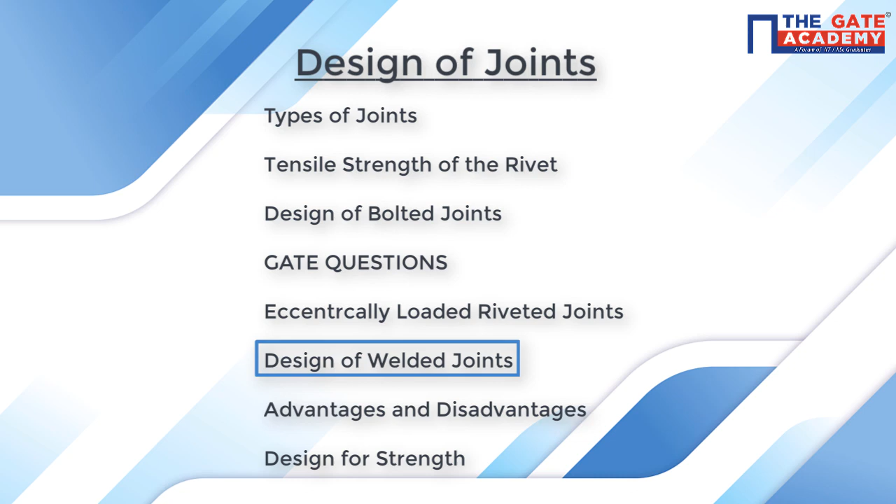First place. Done everybody? Shall we go ahead with the remaining two joints, threaded joints and welded joints? We're done with 80% of this chapter. So remaining 10%, 20% are there. We'll complete them.

After that we'll go with the next chapter, designing of bearings. So today we'll try to complete half part of designing of bearings.

So we are going with the next one, designing for threaded joints. Please remember that the questions from this part are not asked at very higher depth. So whatever is required at the gate level, we'll be discussing at that level itself. Same goes for welded joints as well. That's the reason why 80% of the chapter is dedicated to only rivets. The remaining 20% is only for threaded joints and welded joints taken together.

One of the biggest advantages, or the biggest reason due to which we are using threaded joints for these many number of years, is that they are separable. Due to threaded joints, we can experience higher load carrying capacities of joints and also keep them separable. Whatever threaded joints are used nowadays, every threaded joint is a separable joint. Due to this biggest advantage, we are using these threaded joints that extensively.

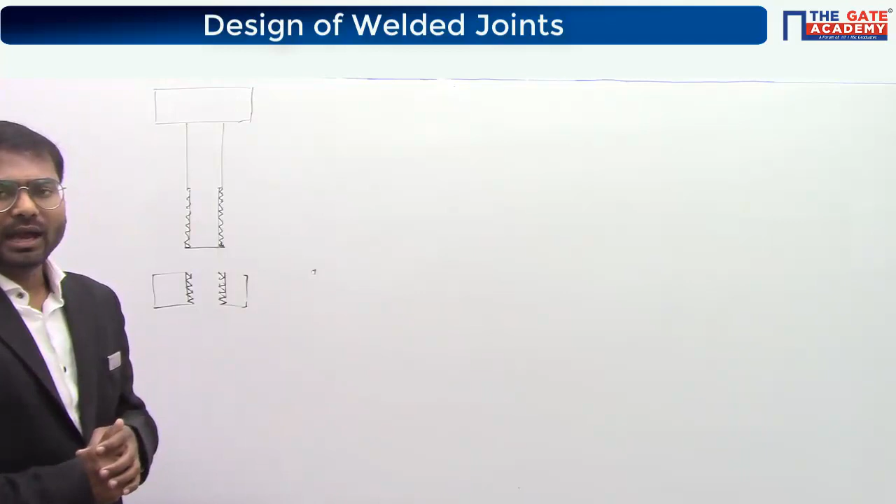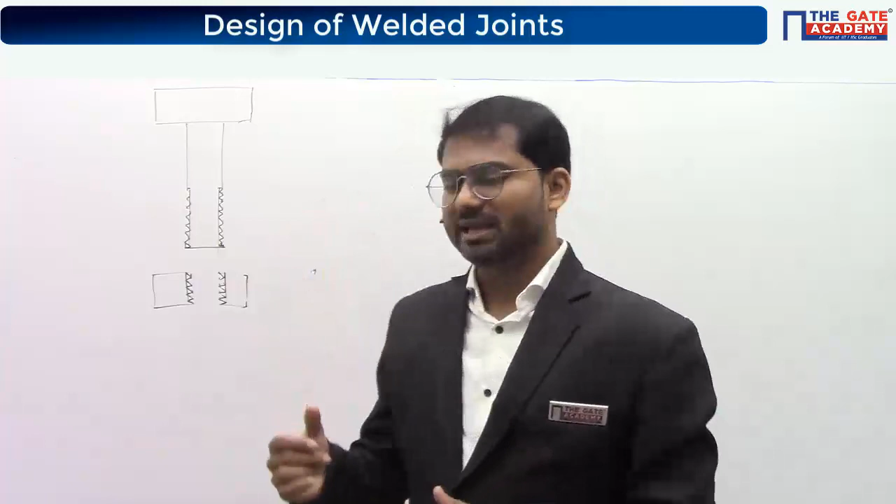Now, if you join those two plates this way, there is a high chance that the bolt head can damage the top surface plate, and the nut can damage the bottom plate surface. The reason is the basic level heat treatment process which we use for the bolt and nut assembly is quenching heat treatment process.

Bolt and nuts are made to experience quenching heat treatment process. This quenching heat treatment process makes the surface very, very hard. In fact, it brings a huge amount of brittleness in the total volume, and it also creates huge hardness on the surface. As the bolt and nut materials are very hard, definitely they are going to be

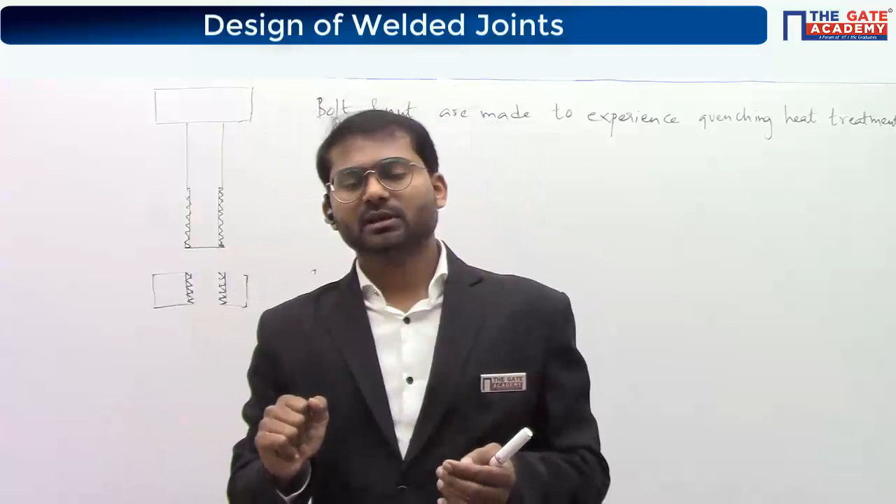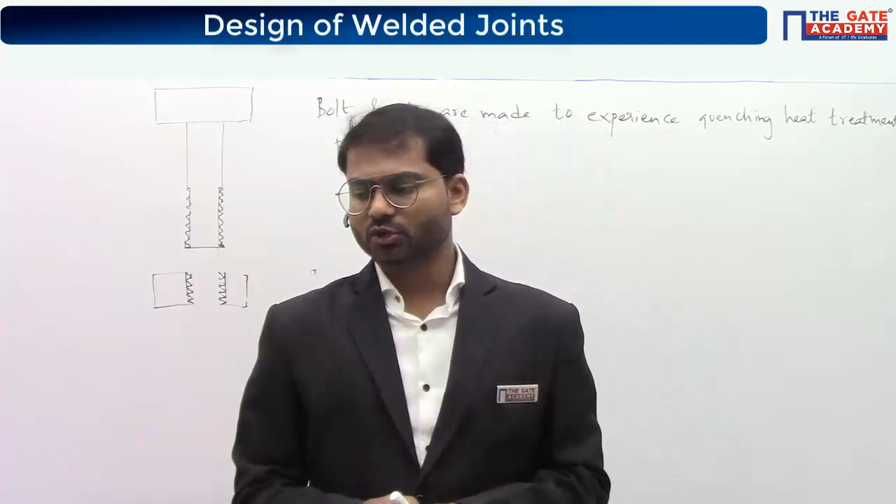Washer is between the head and the plates. If you take it, the washer will be kept here. So this is the washer, this is the first plate, and this is the other plate. So this is one washer, and this is another washer. Here also you should keep another washer.

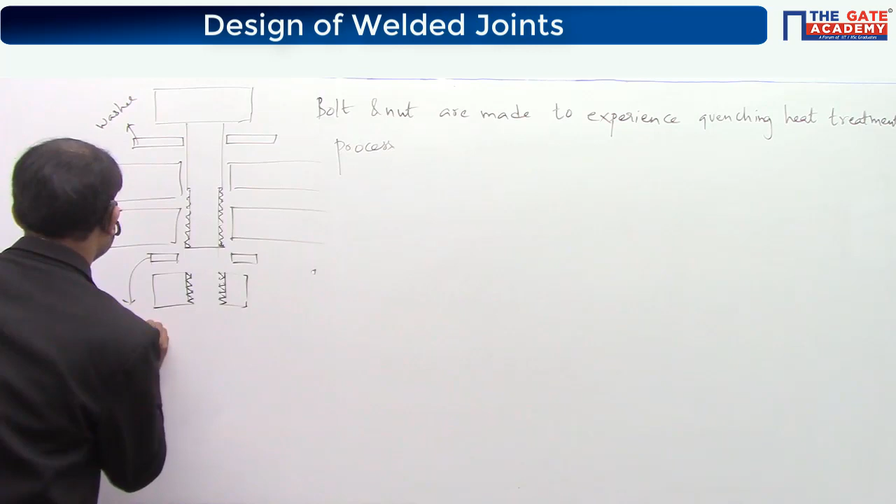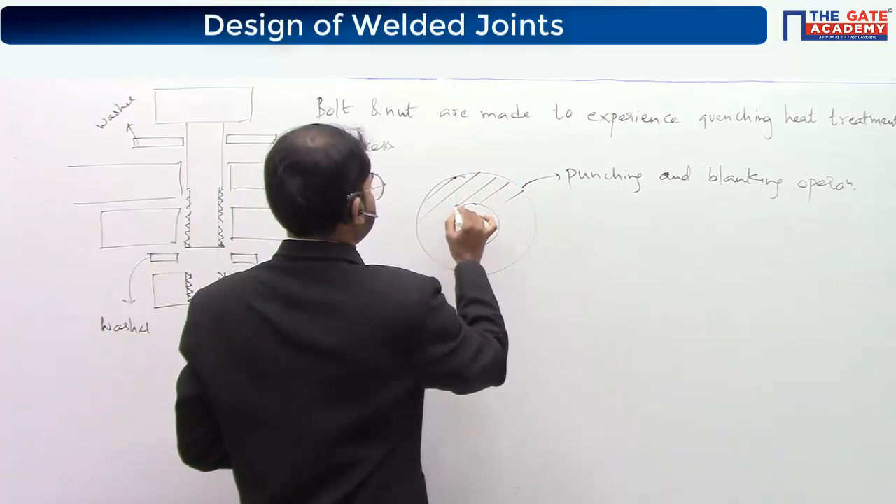Washer means simply like this. You will make a disc and punch a hole. So it is simply made by blanking and punching operation. In manufacturing engineering, we'll study about this operation. The material will be like this, through punching and blanking operation.

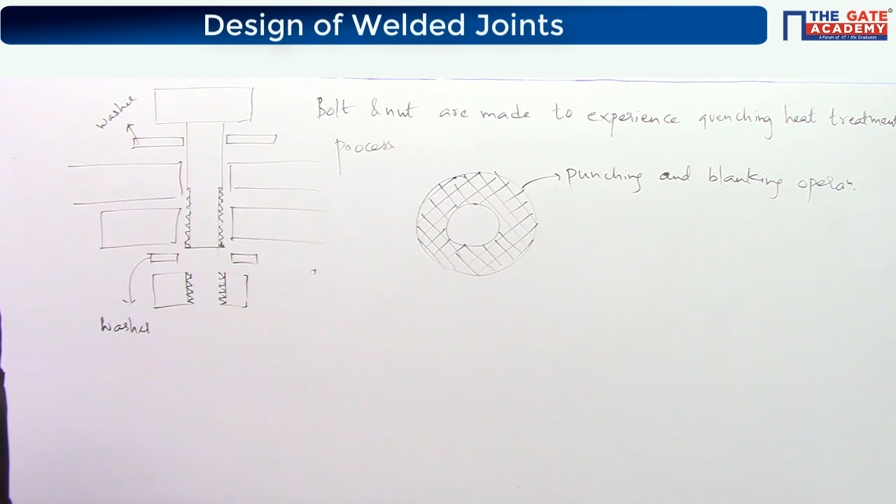Clear? The very important usage of this washer is it avoids damage of plates by the head of the bolt and the nut. Due to this reason, washer is used.

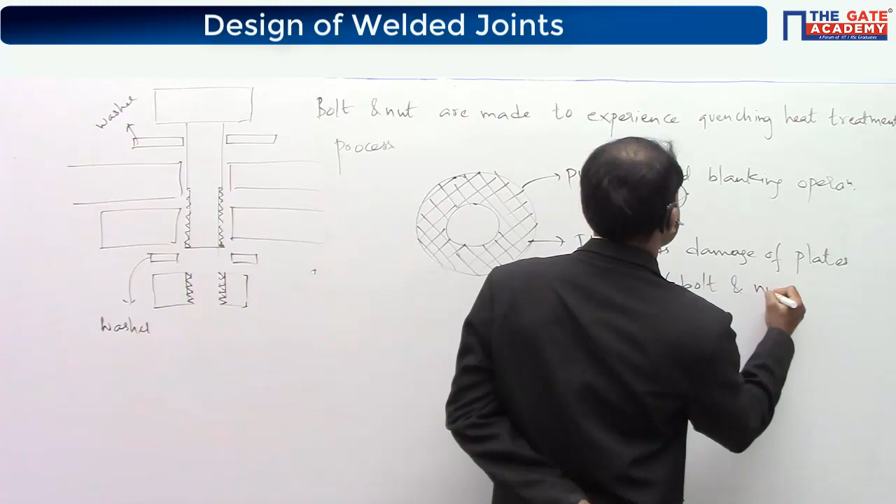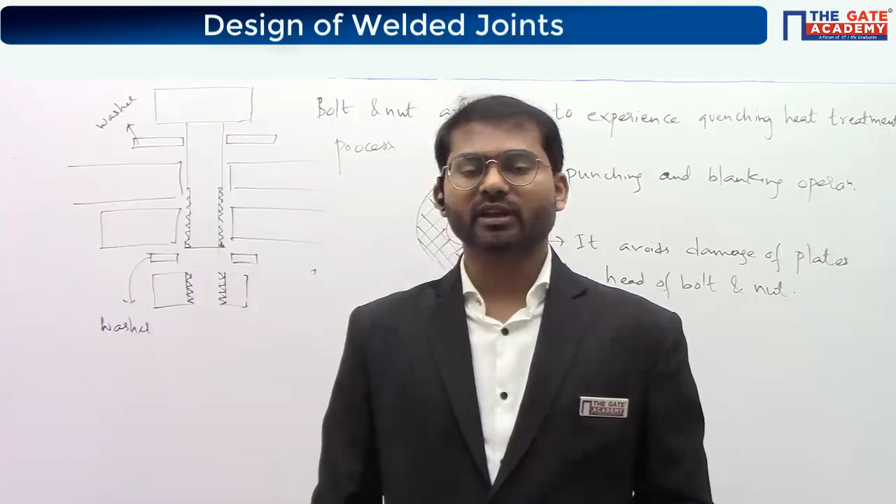It is one of the interview questions. It can come in interviews because these are all basic things that are tested, one-line answers which are very important in interviews. So kindly remember this. Clear? Kindly copy all these things, we'll go ahead.

So there are few terms here, many of which are already familiar to you regarding bolted joints. Let's discuss them. Generally, whenever you make a bolt, you know it has 3 parts.

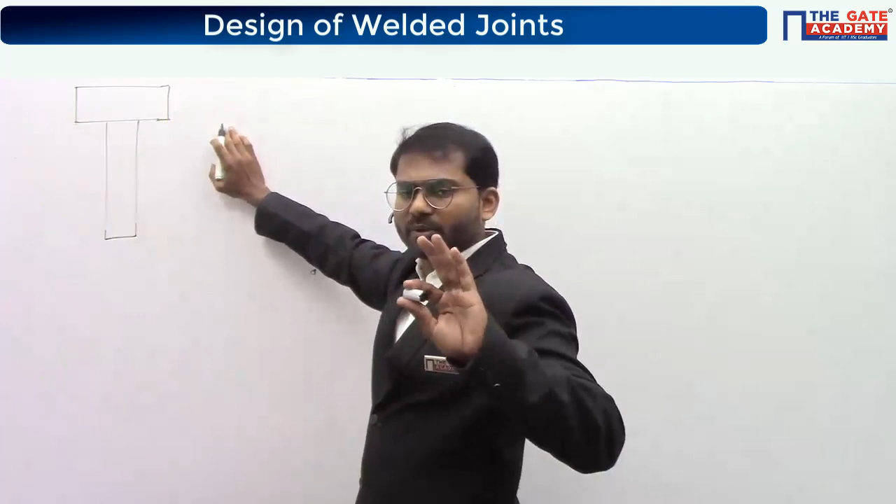When manufacturing this bolt, we do the turning operation or whatever manufacturing process is required to make the head, then turning to make this part. After producing the cylindrical part, we do the threading, which produces the thread. So this part is called the head, this part is called the shank, and this part is called the thread. I hope these basic terms are known to you.

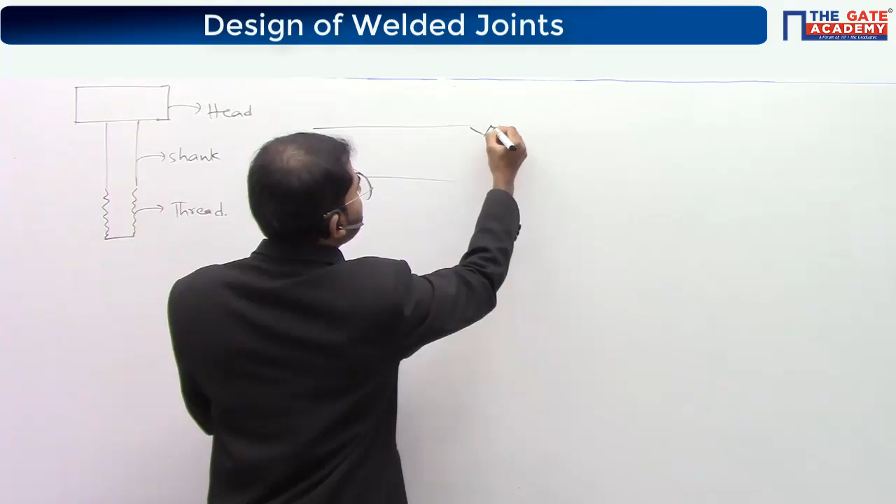Now, if you take the shank or cylindrical part, the thread is made from it. This diameter is nothing but the major diameter, also called the nominal diameter.

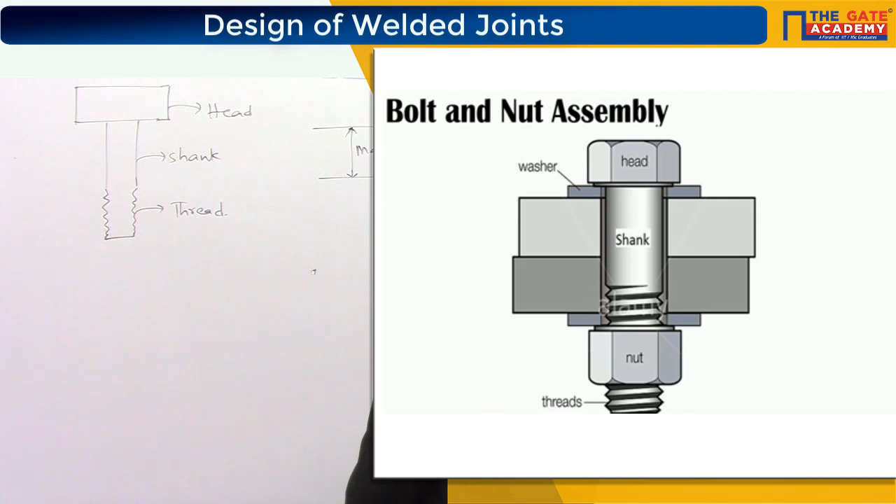And this diameter here is given the name minor diameter or core diameter. So major diameter and minor diameter — these two are very much known to you already.

Now let's see the pitch or effective diameter. If you take the thread part, the thread would look like this. If you draw an imaginary line passing through these threads, taking those lines which produce the same value of intercept on the thread and in the gap, the distance between these two lines is called the pitch or effective diameter.

Please remember that major diameter and minor diameter can be measured directly because they are physical values that can be seen. But the pitch or effective diameter is only a virtual, imaginary concept — we can't see it directly. In manufacturing engineering, when studying metrology and inspection, there is a technique called the 3-wire method, and another called the 2-wire method, used to measure and calculate this value, since we can't just imagine where the line passes. It's not feasible to do it that way, so we use the 3-wire or 2-wire method. I hope these three terms are clear.

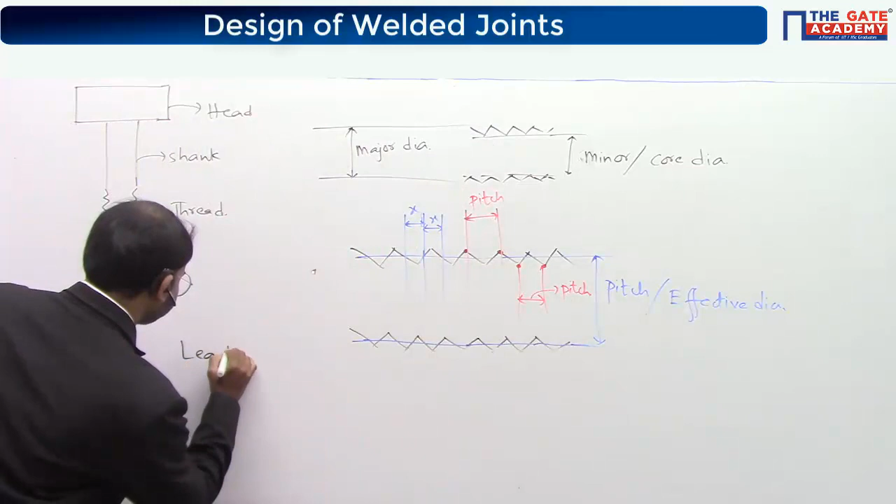The next term is very important — more than the definition, you should be clear about the difference between lead and pitch, because they are not always the same. Lead is defined as the axial displacement of the bolt per one revolution — when you rotate the head of the bolt by one full revolution, the axial displacement produced is called the lead.

After this, we're going to see the difference between lead and pitch, and also when lead and pitch become the same. Kindly copy this down, and you can take a screenshot of the next part.

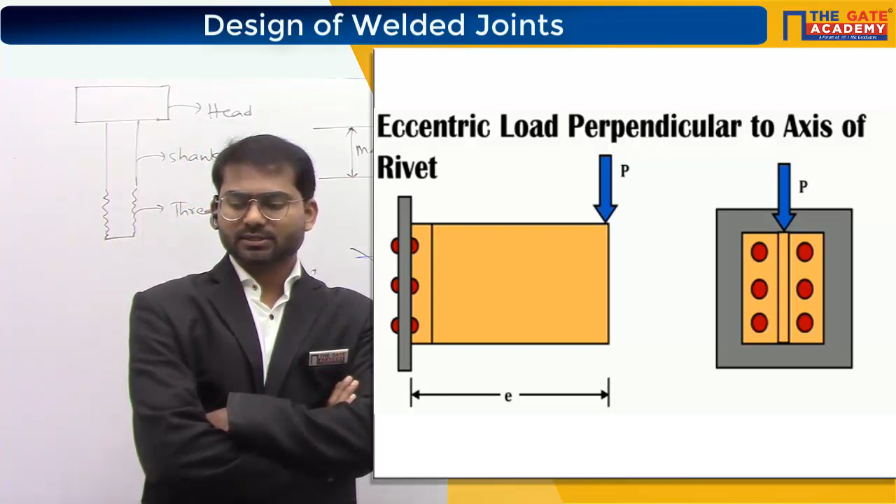The difference between pitch and lead arises when there are multiple threads, which we call starts. If there is a single thread, it's called a single start bolt. If there are 2 threads, it's a double start bolt. Similarly, if there are 3 threads or coils, it's called a triple start thread. When there are double starts, the lead becomes double the pitch, or the pitch becomes half of the lead.

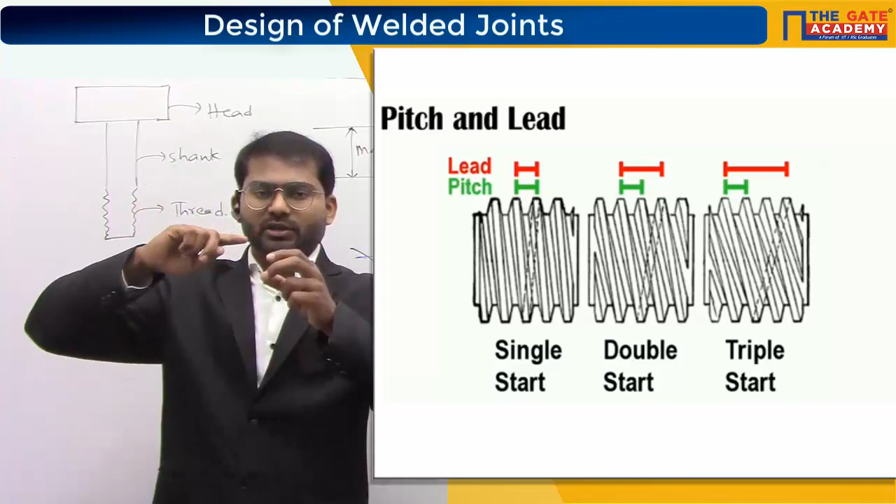In the same way, if you see the triple start thread, when there are 3 coils or 3 threads, you can see that pitch becomes 1/3 of that. The actual rotation, the actual displacement is produced by 1 revolution, that means if you rotate the bolt by 1 revolution, actual displacement will be happening.

The actual displacement happens based upon the thread, how much distance the thread was made to go. So this is the core part. Let's assume this is the thread here. It comes like this, like this, and here. So this thread goes from here and comes here. So this is the axial displacement, which is nothing but the pitch. It will go like this and it will come.

Now in between you put another thread. Let's assume it is a double start thread. So what I am doing here, I will put another thread, I am putting a different color here. It will go like this, it will go here, and again it comes from here. Understood?

Sorry, this displacement is lead actually, we discussed this one as lead, not pitch. But for pitch, we have a definition that distance between 2 adjacent points. Now if you observe, this point, the similar adjacent point is no longer this one. If this thread is not there, this would have been the adjacent point, then we would have called this one as the pitch itself. But this thread came up, so this becomes the pitch.

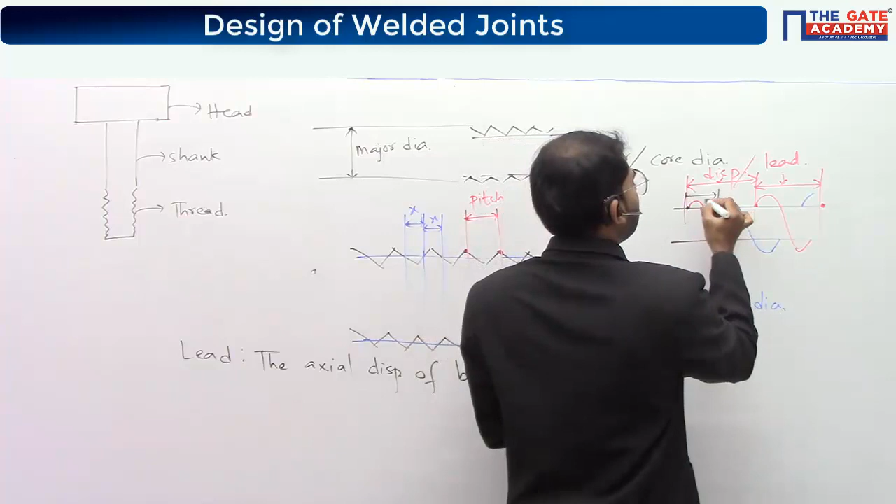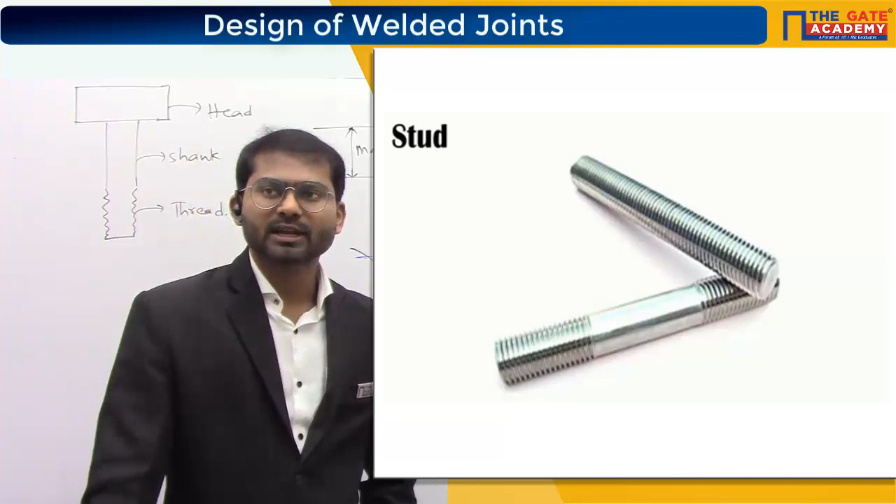So based upon the number of threads or the number of starts, the pitch decreases by that factor. So if 3 starts are there or 3 threads are there, pitch is equal to lead by 3. If 2 starts are there, a double start thread, then pitch is equal to lead by 2. Axial displacement is going to be the same as long as you are keeping the same lead in each and every type of bolt.

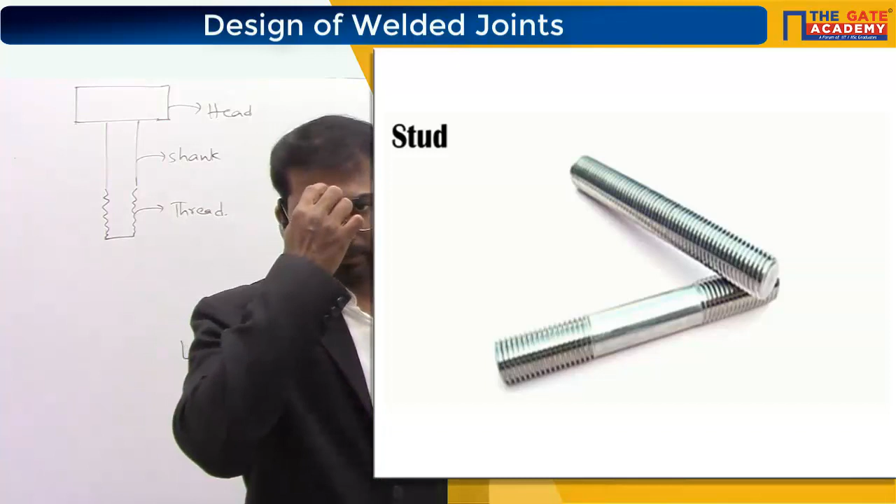You take single start, double start, triple start like shown in the secondary screen. You maintain the same value of lead, then you rotate the head by 1 revolution, in every case displacement will be the same only. Here the discussion is not about which one will have more amount of lead or more amount of axial displacement. The discussion is about the relation between lead and pitch, and based upon the number of starts you will be getting pitch. That means number of starts decide what is the relation between pitch and lead.

Now the other one is a tap bolt. Tap bolt means you will not be having any sort of nut wherever you would like to attach something with a wall, something like that. So then we'll be using a tap bolt. When you can't drill or make a complete hole, then we'll be using a tap bolt.

Then the next one is a stud. Stud means basically, the below diagram is the stud here. Stud means basically a cylinder is taken and thread is made on both the corners. So to join 2 plates using a stud, you have to use 2 nuts and 2 washers. Understand? So a stud is also used in the cases where you can't drill a complete hole from one side to the other side. Wherever you face this problem, you have to go with tap bolt only.

Generally we use screw in the name of tap bolt. So screw is the word in the general sense, because if you talk at machine design or technical sense, there's a screw jack, there's a power screw. There is another definition we'll be using at some other instances or contexts which are not in our GATE syllabus. So screw in our real life sense is used as a general word. Sometimes we use screw for bolt also. We don't use screw for nut, but we do use it for bolt as well. But in most of the cases we use screw for tap bolt.

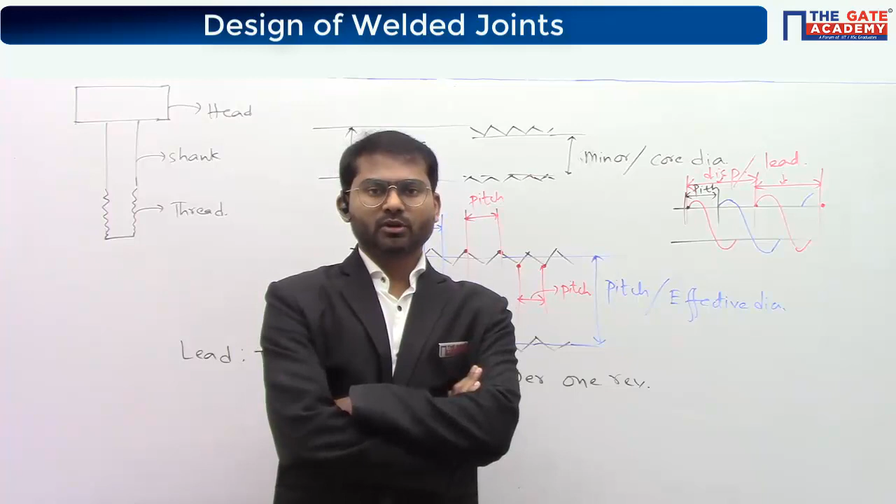Clear? Understand? But remember what is bolt, nut, washer. These terms are very important. You should follow them because in questions if they give you dimensions or something, you should understand what that is related with respect to, whether it is bolt or nut.

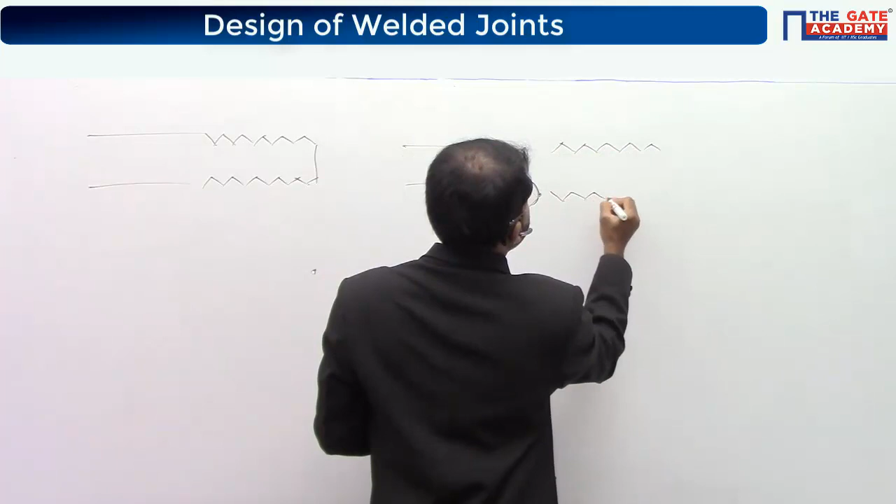Shank is made equal to the core diameter, and you know the requirement of this is to nullify or reduce the effect of stress concentration. If you go with this arrangement, you can see that the stress lines are very near to each other at this region, in these regions here.

So in these regions, the stress lines are very near to each other. There is a high chance that stress can go beyond the strength of the material and cause failure. That's a very dangerous thing.

So we don't expect that to happen. That's the reason why we make the shank diameter equal to the core diameter, so that area of cross section is uniform. That gives rise to same stress along the length, so same strength or designing stress also will be same. We call this a bolt of uniform strength. Bolt of uniform strength means you make shank diameter equal to core diameter.

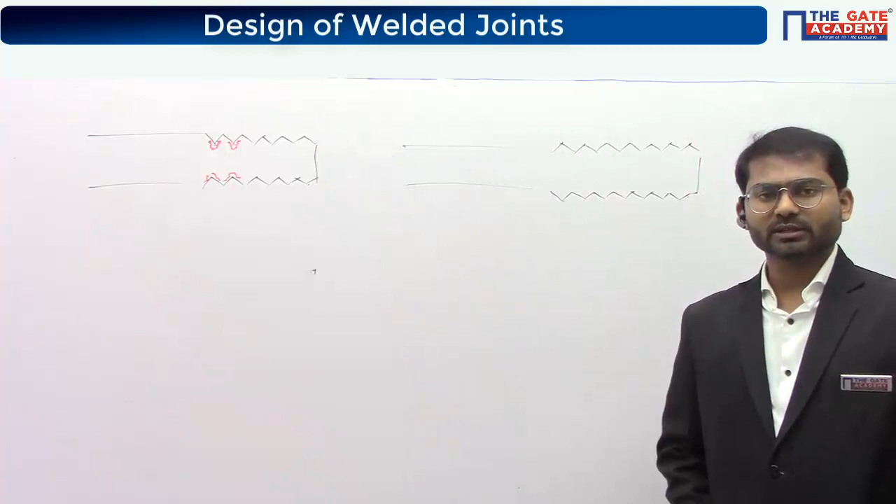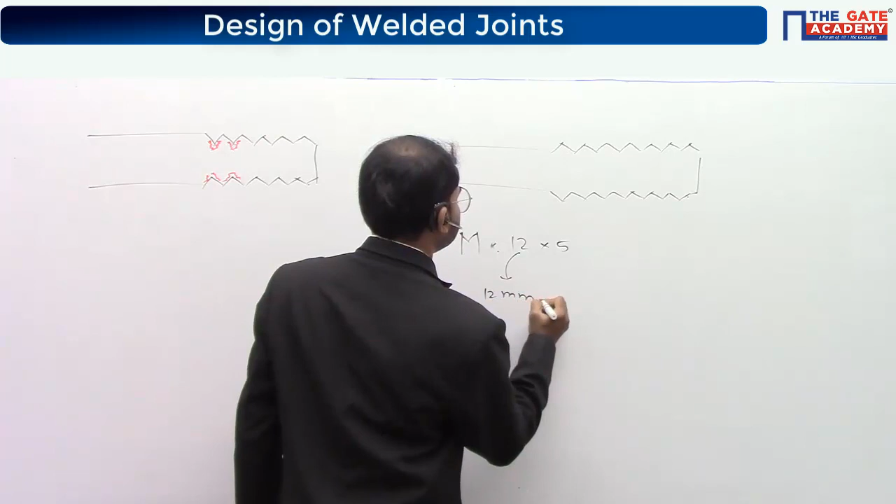And one thing I would like to say, this is very important, I forgot. Generally bolts are given with a name like this, M12 into 5. This means 12 mm nominal diameter, and this is 5 mm pitch. Both the values are in millimeters.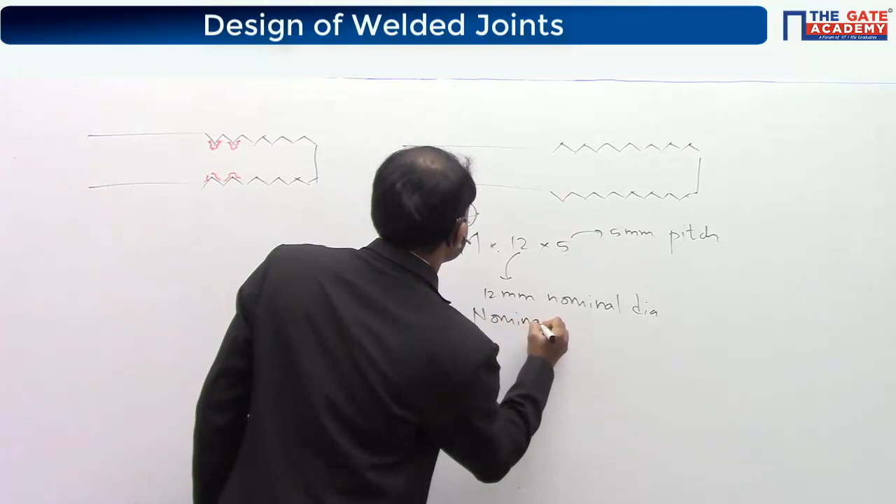Another thing, please keep in mind, whenever they say diameter of bolt, find diameter of bolt - diameter of the bolt is nothing but nominal diameter itself.

Clear? So if you would like to find out stress, you have to find the area of cross section of the bolt required to carry a particular load based upon the strength. So you get the value of area as load by stress, and you'll be getting some area, that is pi d square by 4. That gives you the value of d. You should give this value as nominal diameter, though you are actually finding core diameter - give it as nominal itself.

The reason is, strictly speaking, you should be designing with respect to core diameter only - every calculation should be done with respect to core diameter only. But we do it with respect to nominal diameter itself because it becomes easy for us every time to use, or easy for us to measure the nominal diameter in a practical sense.

And second thing is, in every loading case, we generally, in most cases, take a factor of safety. So when you take factor of safety, automatically this error, whatever it is, can be taken care of. Everybody understood what I said?

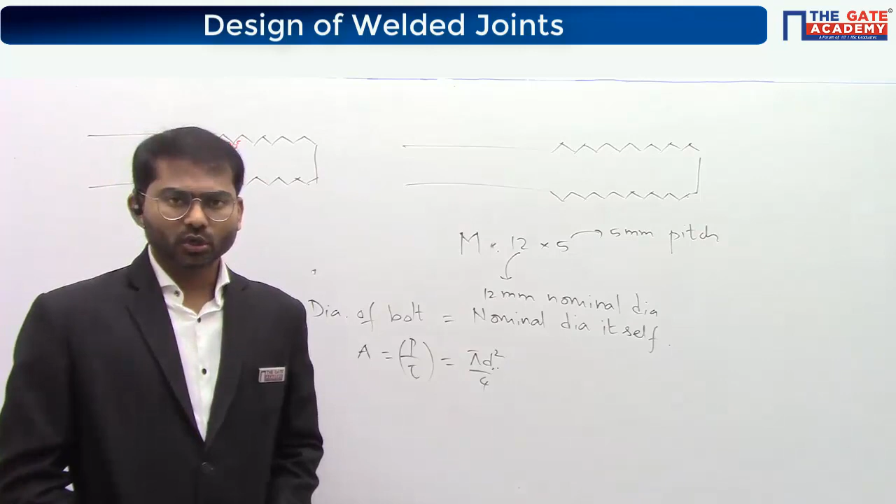I said that though we actually have to, or we are supposed to, design with respect to core diameter of a bolt, we will be designing with respect to nominal diameter itself, due to the reason that in practical sense, nominal diameter can be easily measured. Just take a vernier caliper and simply measure this diameter - you can easily get the value of diameter, which is nothing but nominal diameter. But measuring core diameter is a little bit difficult.

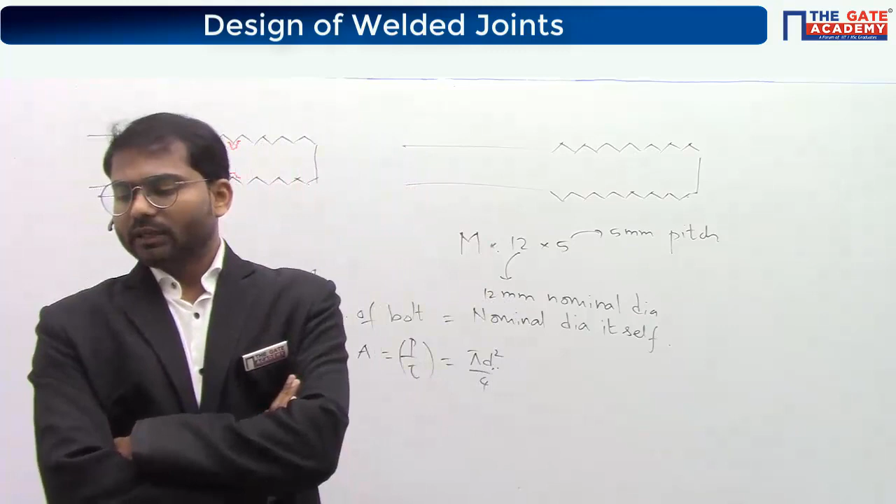As compared to measuring a nominal diameter, that's one reason. And second reason is, though you are going with the nominal diameter, the error whatever it is there can be taken care of using factor of safety. In a real scenario, definitely we'll be taking some factor of safety, so that will be automatically taken care of. You don't need to worry about that. Clear, everybody? So the options are something like this.

M8, M10, M12, M16 - these are the options for this question. Only copy the question and get the answer.

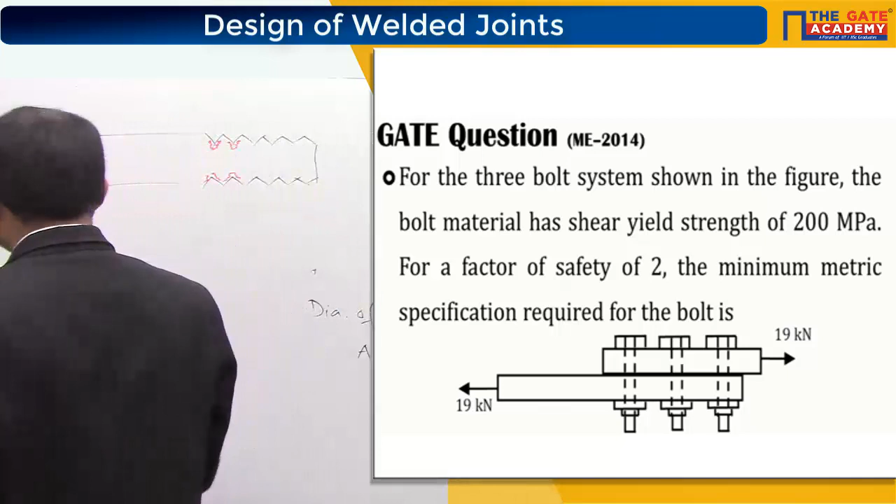In every scenario, it is not completely possible for us to eliminate the effect of stress concentration because we require some shapes. So if you require some particular shape, definitely area cannot be maintained uniformly. So wherever possible, satisfying the objective, we try to avoid the stress concentration. If it is not possible, we'll go with that itself.

Come on everyone, get the answer. Okay everyone, let's look into the solution for this question.

It's given that for the 3 bolt system shown in the figure, the bolt material has a shear yield strength of 200 megapascal. That means shear stress can or should be less than or equal to 200 megapascal. This is a failure stress.

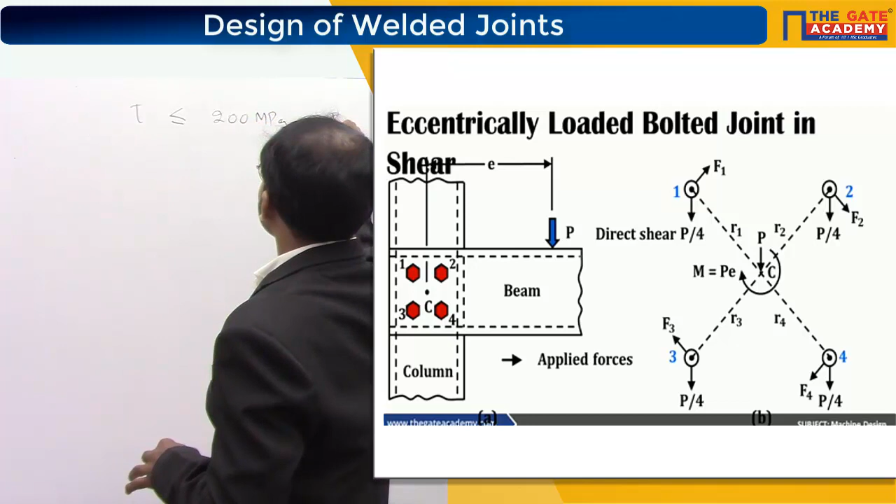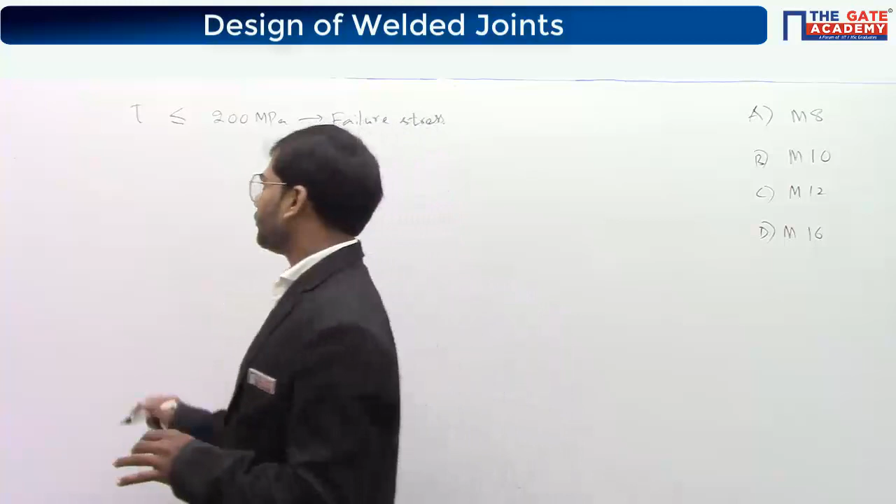But if you see the next statement, it is given that for a factor of safety of 2, the minimum metric specification required for the bolt is. So they are taking factor of safety. So factor of safety should be taken. When you take factor of safety, you have the formula that failure stress by allowable stress.

So factor of safety is given as 2. This implies allowable stress comes out to be failure stress by factor of safety. Failure stress is 200 megapascal. We'll keep it like this. By factor of safety is 2, this becomes 100 megapascal. You have to make sure stress is not going beyond 100 megapascal. That's very much required here.

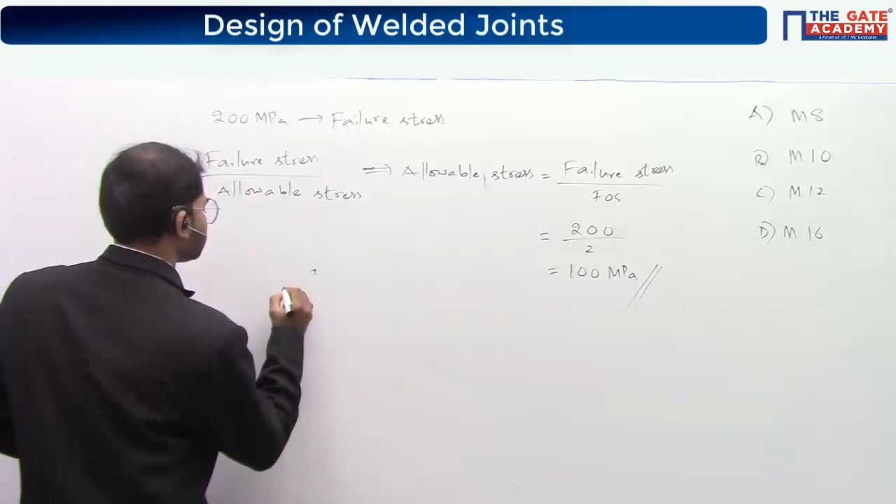Now, if you take here, force is applied. In each and every bolt, shear stress is produced because every force is parallel to area of cross-section of the bolt. The joint fails only when all three areas of cross-sections are sheared. So we can say load stress area relationship is like this: load is equal to stress into thrice the area here. Load is given as 19,000 Newton. Shear stress is got it as 100 megapascal. So I'm putting stress in megapascal, area will come in millimeters square, and this is Newton. So thrice into area pi d square by 4.

If you simplify this, you will get the value of diameter as some 8.78 or something, more than 8 will come. What is the value you are getting? 8.97. So you are getting 8.97. So this makes you think the answer is M8, but it is not the right answer.

Why? Look here. To carry this load, from this formula we should write down area is equal to load by tau into 3 here. To carry a load, area should be greater than this value, P by tau value here. So if you put greater than sign, the sign will be like this, so D will come like this.

To satisfy the condition, we need to carry a load and make sure stress is less than 100 megapascal. That means A should be more than that. If you increase the diameter, increase the load, to increase the numerator, the whole fraction will increase. So A should be greater than P by 3 into tau. That means diameter should be more than 8.97.

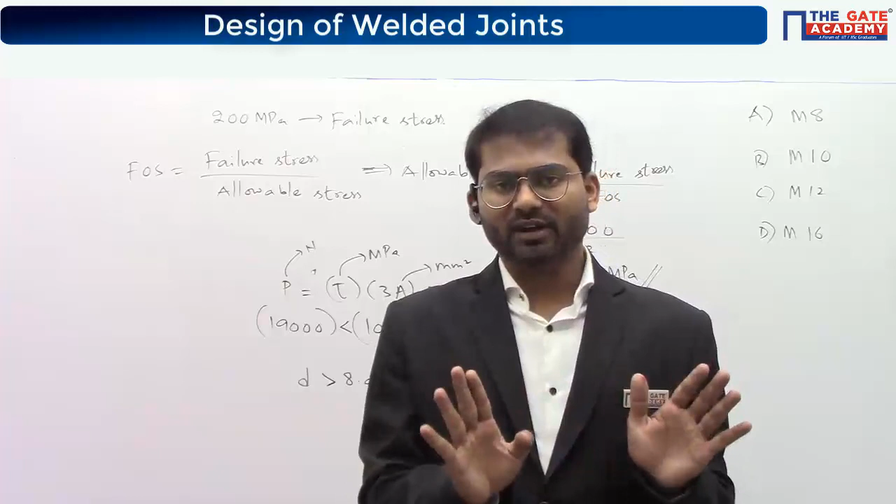Clear? So everywhere they are given the value of diameter itself. Okay? And whatever diameter they expected to get the value, like this question, they expected it to be nominal diameter only. Whatever you get, that is nominal diameter itself.

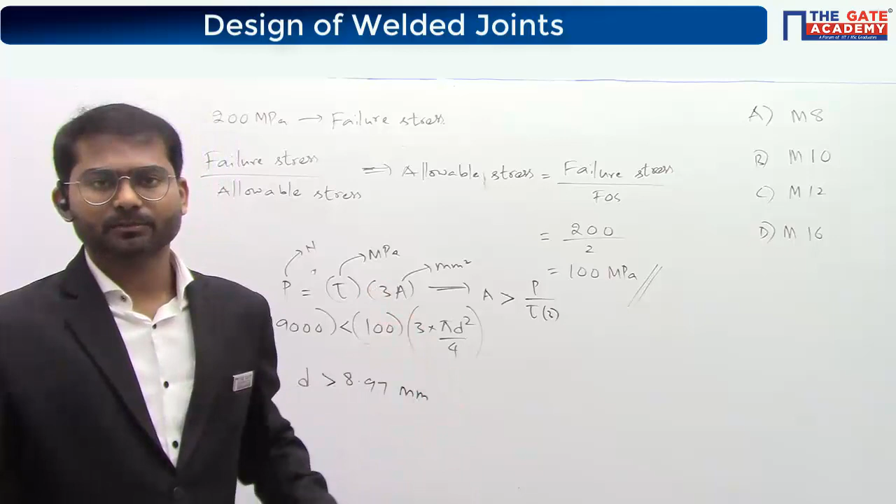Clear? Because 0.8 times diameter is not for every type of thread, because there are different types of threads based upon the requirement or objective you have. So in every case it is not followed. That's the reason why we can't go with the formula 0.8 times diameter. So in textbooks for your semester syllabus, they tell you to use the formula in a default way wherever you don't know the type of the thread available there.

Clear? So kindly solve this question, the first step of eccentrical loading. I hope everybody have understood that this is the first type of eccentrical loading, where primary and secondary both are of shear type. I hope at least there is no confusion regarding that.

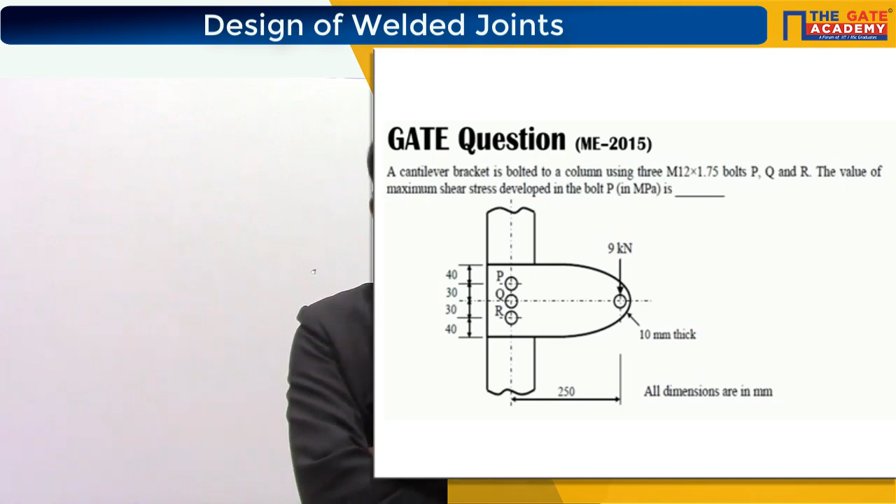If you are getting answer for this question, I want you people to apply the knowledge of this question in the next question and get the answer just by looking into the options. That's why I want everybody to get the right answer for this question. Kindly don't skip it.

If you got the wrong answer, the correct answer is around 332.5 megapascal. This is the correct answer.

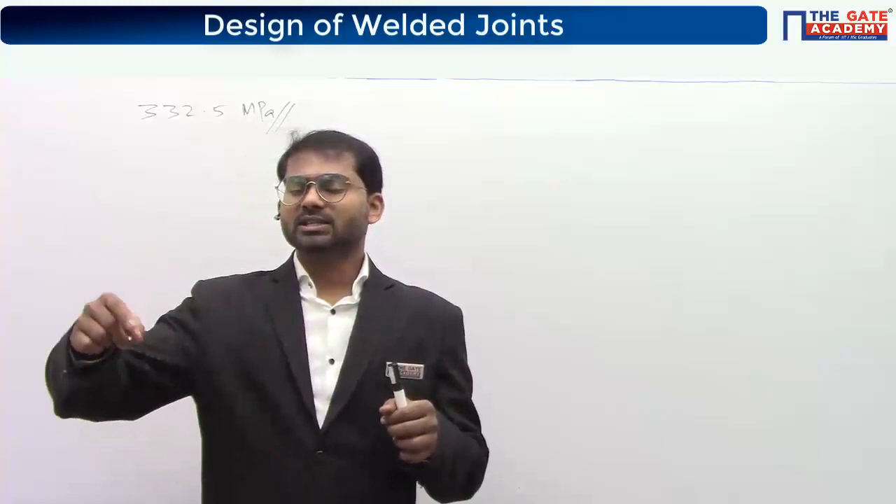Okay, so let's go ahead into the solution here. Listen carefully. Anyways, if you have got the answer, then there is nothing extra to understand here. But whatever knowledge you have applied to this question, that will help you to get the answer for the next question without solving anything, without using pen and paper.

I can show you the screenshot, I can show you the question as well. So I want you people to think smartly based upon the knowledge of this question, the previous question, and get the answer for this question here. You just have to identify which option is right, that's all about this one here. Okay, so if you solve this question, there are three rivets which are kept in a vertical fashion.

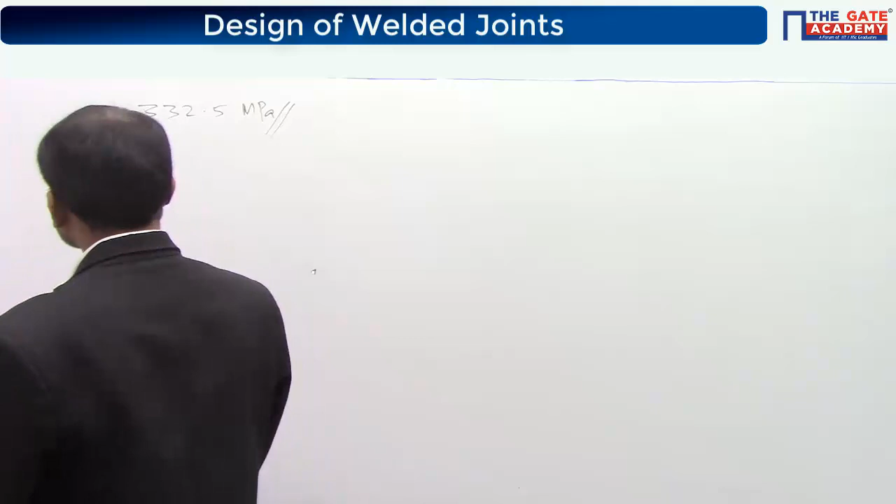So this is a centroid. If you transfer the load here, you will get P and P into E clockwise. Let's take this numbering as 1, numbering for this one as 2, numbering for this one as 3. So we have P1 dash like this, P2 dash like this, and P3 dash like this.

And you know the value of P1 dash, P2 dash, P3 dash. It is simply nothing but 9 by 3 kilonewton. Now you have to take R1, R2, R3 so that we can find out the secondary loads. So this is R1, R2 is equal to 0 or R2 won't exist, and this is equal to R3.

Now you take the perpendicular direction. So this is a perpendicular direction, this is a perpendicular direction. So we have P1 double dash like this, and P3 double dash like this. This is 90 degrees, this is also 90 degrees. So theta 1 is equal to 90 degrees, theta 3 is equal to 90 degrees.

Now, in this question, they are asking the maximum shear stress developed in the bolt P, that is the first number here. Directly we have to get for this one. So if you take the primary one here, primary is nothing but 3 kilonewton. Secondary one is nothing but P into E into R1 by R1 square, R2 square and R3 square.

This comes out to be P is nothing but 9 kilonewton. E is equal to, given in the question, as 250 millimeters, and R1 is equal to nothing but 30. So by 30 square plus 0 square plus 30 square. Okay, so you will get the secondary force value.

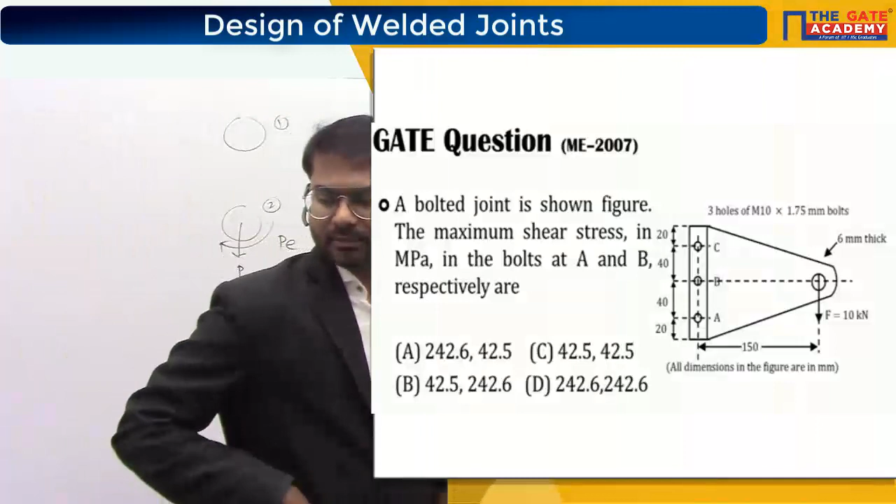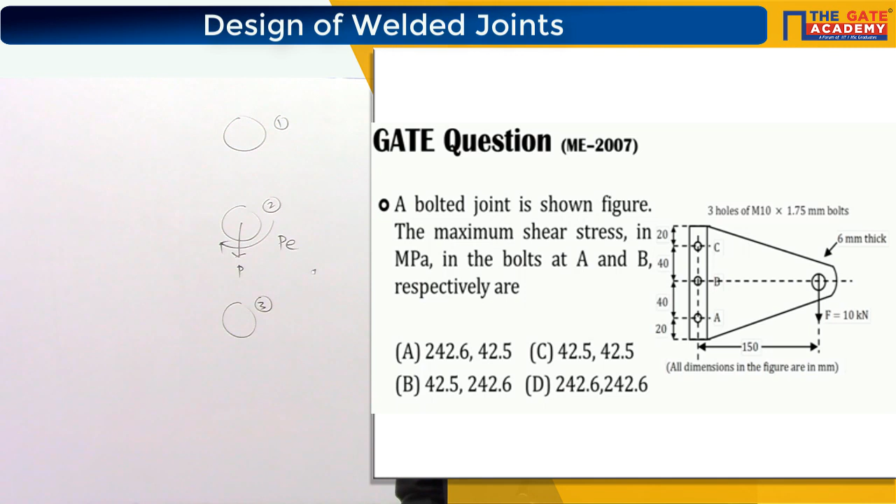Clear everyone? Now tell me, think smartly and tell me the answer for this question. Without looking at the options, without doing any sort of calculations, just by looking at the options, can you tell me which option would be the right answer for this one?

Very good. The answer is A for this one here. In GATE examination, we will never use the formula DC is equal to 0.8 D unless mentioned in the question. Absolutely, Kumar Vishesh. Yeah, let's look into this question here.

They said that a bolted joint is shown in the figure. The maximum shear stress in megapascal in the bolts A and B respectively are. So we have to give the answer for A first and then B. So A is the extreme one. B is the middle one.

You see that the middle one is not having secondary load. The extreme one is having the secondary load. Okay, so from those two you can easily tell that the extreme one will be having higher value of net load. So higher value of net load as compared to B means higher value of net stress as well. So A should be more than B.

That is the answer. So whatever will be the value of A, whatever will be the value of B, A should be higher than B. If you see the options here, only option A is giving higher value for A and then lesser value for B. Option B and C, option C and D are having equal values, which is not right. And option B is giving lesser for A and larger for B, which is not the right answer. So the answer is only A.

Understood? So after solving this question, you have just taken some seconds, not even 1 minute, 30 seconds to solve this question. Clear? This comes with practice. So imagine one student is solving this question in 30 seconds, like you people, and some other student, without using his brain, is just going on solving completely. He's using 3 minutes. Okay, average time for solving a question is 3 minutes.

Before solving this question, I would like to give the derivation for the secondary load formula. Based upon that only you can get the answer for this question. In fact, directly using the formula you can get the answer, but I want you people to give the derivation for the formula now. Okay everyone, shall I go ahead? Okay, so let's go ahead.

So the derivation is all about the moment-force relationship. Listen carefully, this is a basic engineering mechanics concept. If a force is giving rise to a moment, I told you moment means turning effect. For example, it is like this: I am applying some force to cause rotation. Here no translation is happening, so you take the whole body is experiencing rotation. So some force is causing rotation. So rotation means moment. Moment of a force you can take it as rotation.

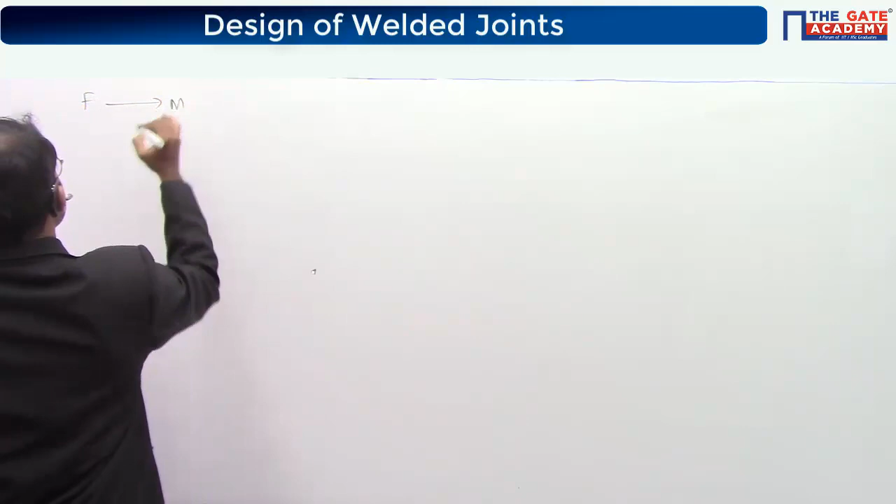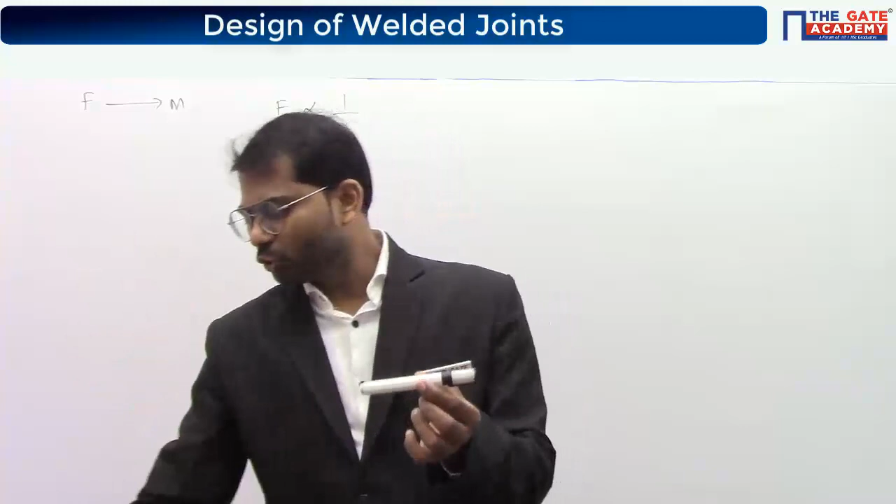So when a force gives rise to a moment, we always have the relation that force will be inversely proportional to distance. That means if you would like to give rise to the same rotation, I'm taking 2 cases here. First case is I am applying the force at the corner. Another case is I am applying the force at the middle, on the right arm, middle point here. I hope it is clear to everybody.

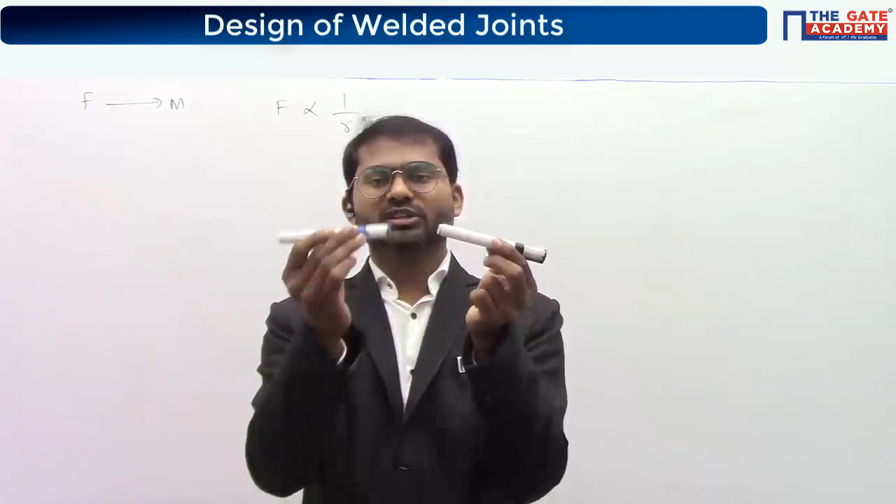So the point of application of force for this case is here. Black one is at the corner, blue one is in the middle, somewhere else here. So to create the same rotation, I'm unable to demonstrate it physically, but I'm just showing you, you will be required to apply more force in this case, because the radial distance is smaller in this case. That is what I would like to say. Everybody understood this thing here?

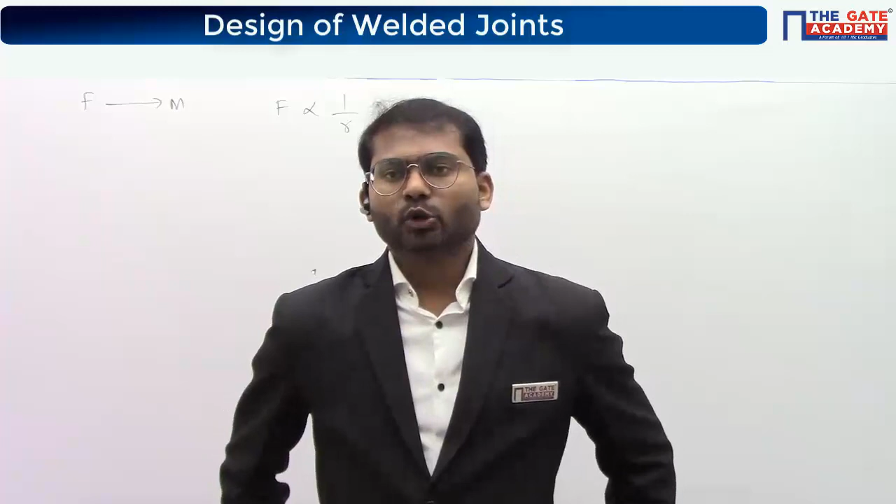To create the same rotation, larger is the distance, lesser is the force required, or vice versa. That is the concept I have told you here, which is already known to you people. This is the thing which is already known to you here.

Second case is when a moment gives rise to a force. This means the rotatory effect of a component will give rise to a force. Just like we have seen in eccentric loading, some force gives rise to a moment, and that moment has given rise to secondary forces. All these secondary forces are forces which are produced by a moment. If the moment is not there, then the secondary force will not come. Of course this is produced by some other force, the applied force, but I am not concerned about that.

When a moment gives rise to a force, the condition is: force produced is proportional to R. That means larger is the distance from the center of rotation, larger is the value of force. It is not according to the previous condition. Though mathematically everyone will have the same formula, M equals F into R, for both cases M equals Fr only. But the relationship between them, the variation in real scenario, will be different. For the same moment to be produced, larger is the distance, lesser is the force required, or lesser is the distance, larger is the force required. But when moment gives rise to a force, what happens is, since force is the output and moment is the input, force produced will be higher at the larger distance.

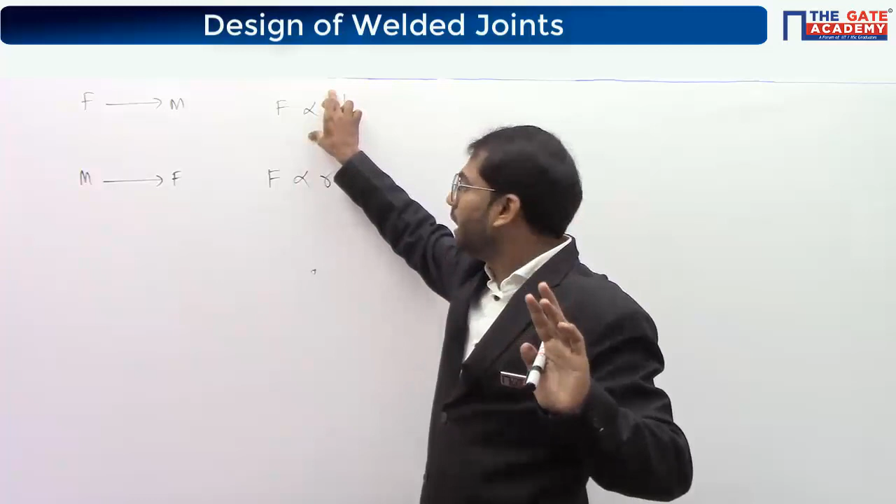How do we consider this? In your real life scenario, you've mostly gone through these cases only, so you are very familiar with this formula here, but you haven't gone through these other cases.

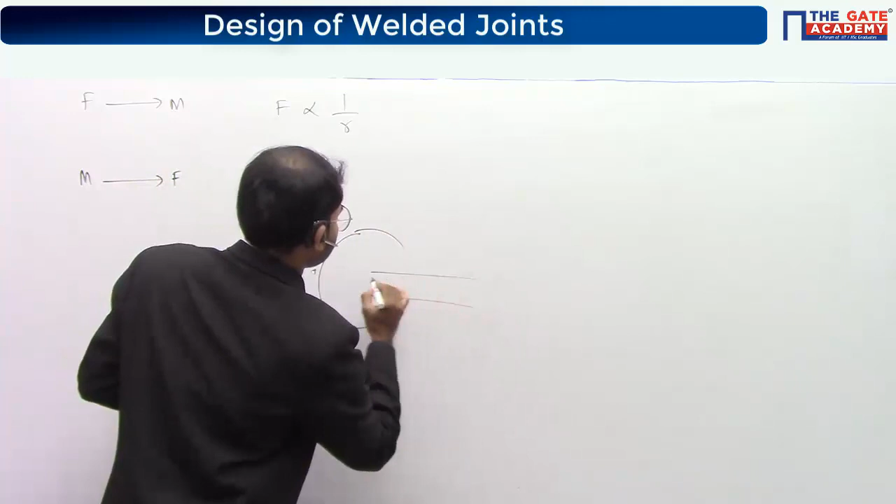For example, let's assume there is one shaft attached with a big disc here, or basically a flange. We can call it a flange.

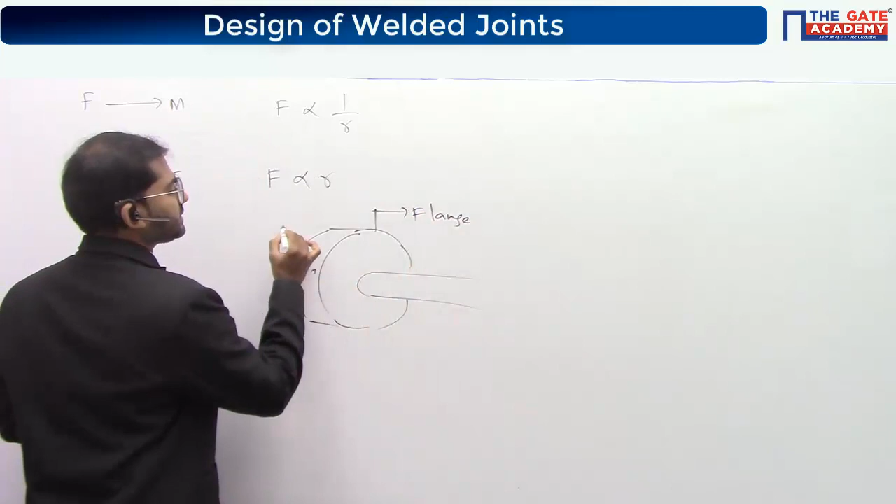In fact, I am showing you a coupling here. Two shafts are joined using a coupling, so this is one flange coupling. This is one flange of this coupling, and this is another flange. These two flanges, imagine flange means a disc basically, so these two shafts are attached with this disc here.

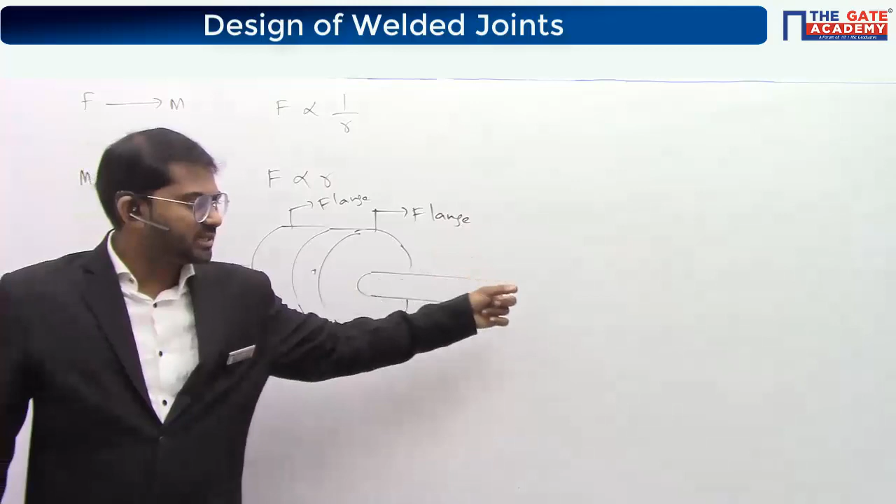You might use a key joint to avoid relative motion between them. If the shaft is rotating, this flange also rotates, or the disc also rotates. Now we should join these two also, so that whatever rotation is given to this shaft will transfer to this one. So whenever you would like to transfer rotary motion from one shaft to another, we use a coupling.

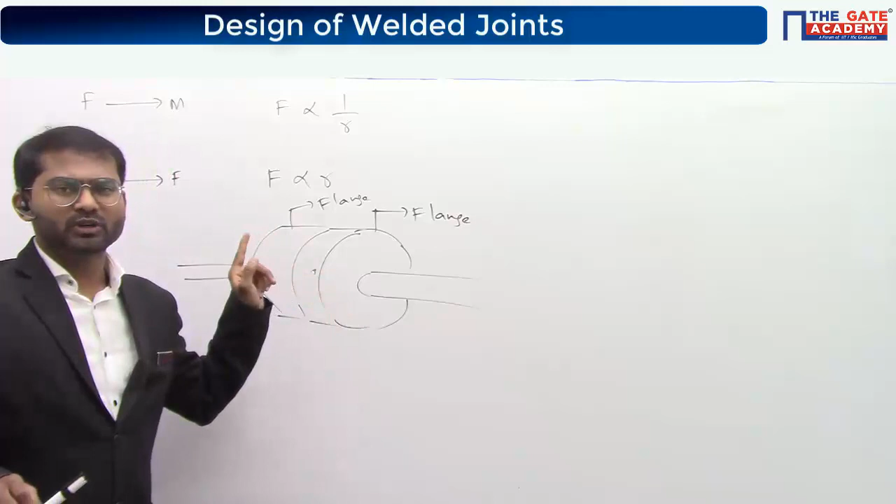That's the requirement of a coupling, and unfortunately coupling is not in your syllabus, but it's a very simple concept. So to join these two flanges or discs, what we'll be doing is using bolts.

Here one bolt is there, attached with a nut from that side and joined here. Another bolt here attached with a nut from that side. Another bolt here attached by a nut from that side. Like this, we'll be using the required number of bolts.

Mostly we'll be using bolts only, because whenever we require them to separate, we can easily separate them. If you use a rivet, they will be permanently joined, and that's a very rare requirement. Permanent joining is not required in most cases, so we'll go with bolts here.

Now let's imagine the bolts are not kept at the same radial distance. In a real life scenario, every bolt will be kept at the same radial distance.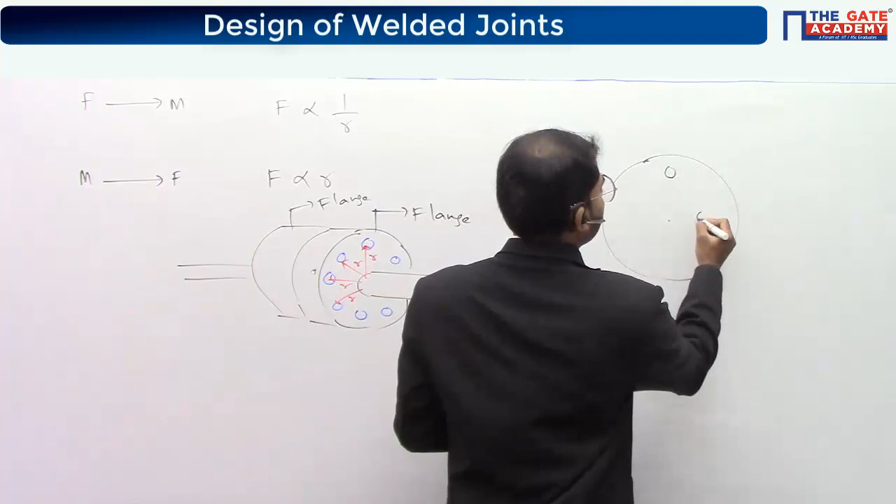Let's take a case where, from the center, one bolt is far away and another bolt is very near. This is R1 and this is R2, with R1 greater than R2. So if you try to apply a moment, this is input and this is giving rise to M output. Moment means turning effect or rotatory effect, transferred from one side to the other side.

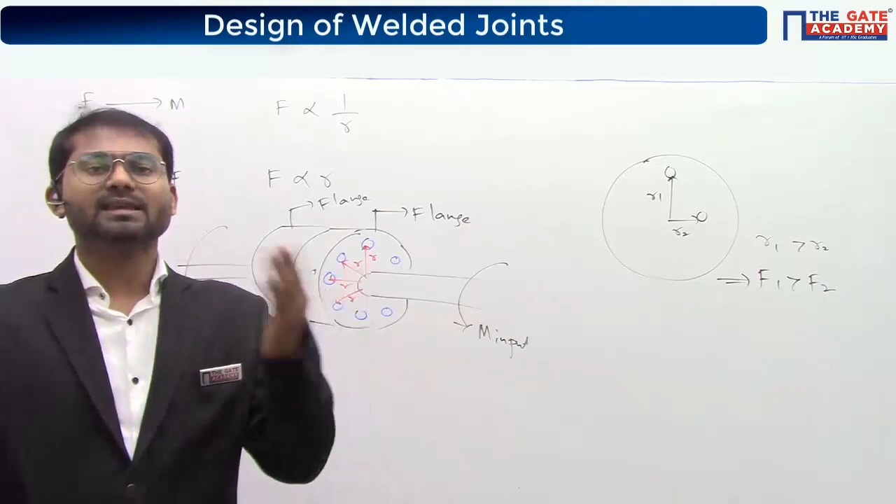If R1 is greater than R2, whatever force comes up, F1, or whatever shear force, will give rise to shear force here. The shear force in the first bolt will be more than in the second bolt, due to this moment. Whatever shear force is produced in the first bolt will be higher than the second bolt based on this condition, because moment is giving rise to this force here.

Is it clear to everyone? Is it clear to everybody? Any doubt regarding this? Is it clear? Let me repeat the last statement: moment is giving rise to a force.

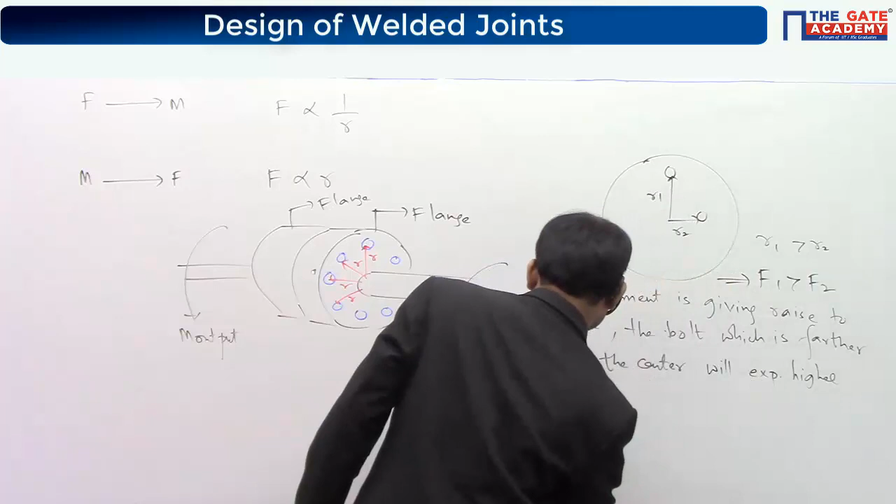I'll write down the statement here, you can copy it: moment is giving rise to force. The bolt which is farther from the center will experience higher force. That is what I said. So F1 will be greater than F2 here, as R1 is greater than R2, that means F1 is greater than F2.

Any doubts? Done, everybody? Okay, so I'll give you the derivation for this secondary load formula here. Secondary load means whenever moment gives rise to a force, we call it a secondary force. The name comes from comparison with primary force: primary force is produced by a force, while secondary force is produced by a moment.

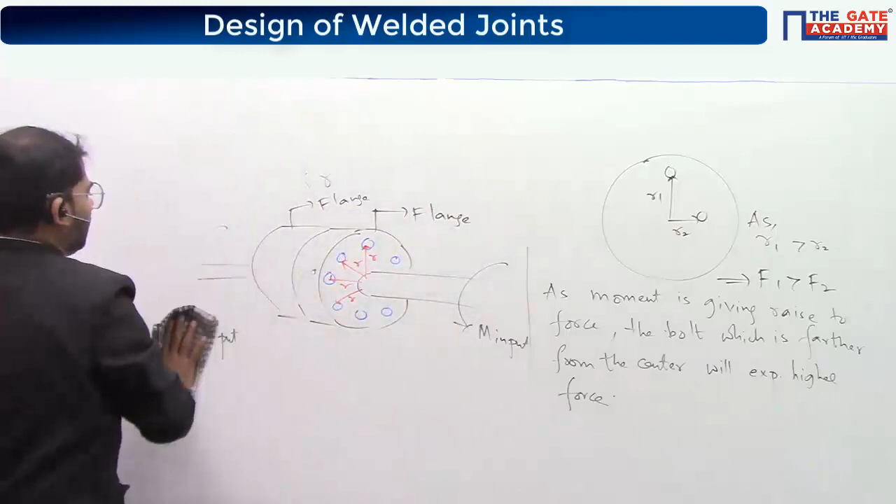Now let's find out the derivation, or look into the derivation of this secondary force here. Let's take this disc only for our understanding purpose, and take a very simple, general case where different rivets are at different distances.

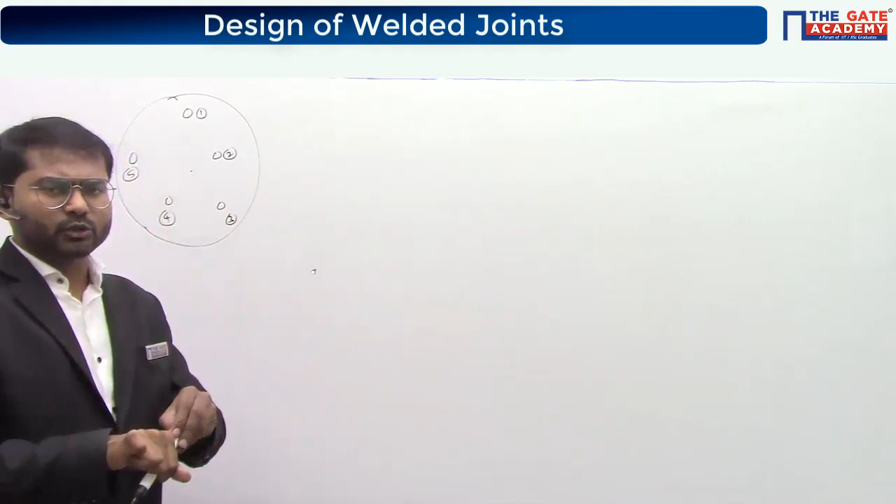This is the first one, this is the second one, third, fourth, fifth one here. It's only required to show 2, but I'm just showing 5 here, so every bolt is at a different distance.

This is R1, this is R2, this is R3, this is R4, this is R5. Okay, some moment is applied here, some rotating effect is given here, that is M. So anyways, M we always have seen in every eccentric loading as P into E.

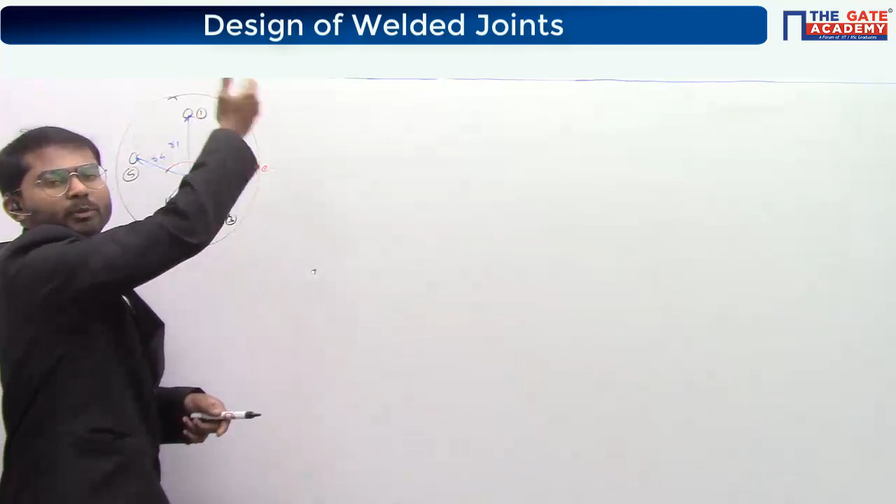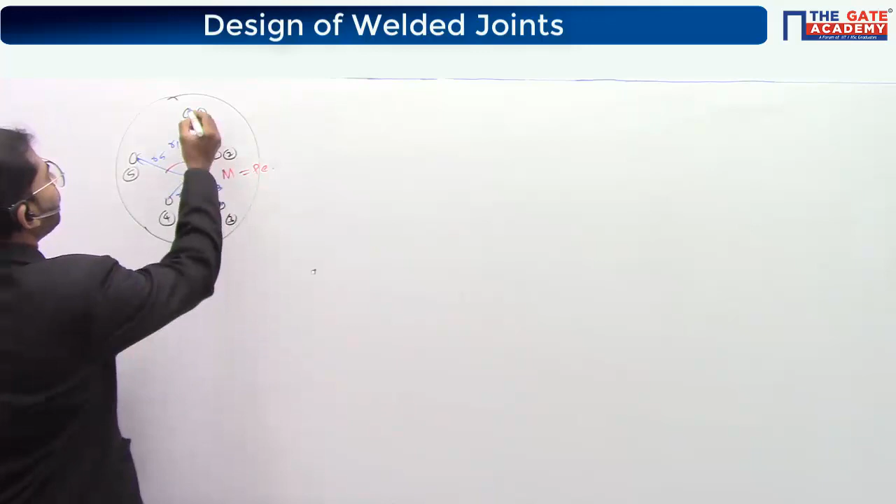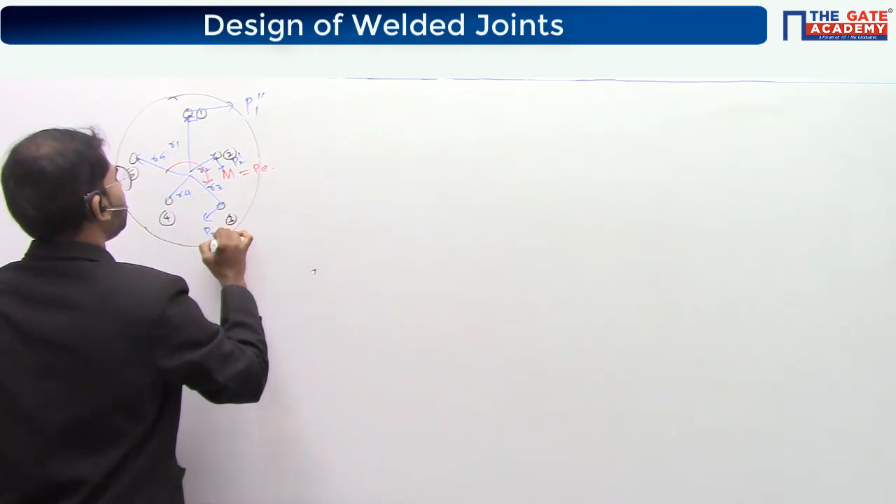So remember, M is equal to P into E. So whatever input moment is given here, there should be an output moment given by each and every force. If you assume the force produced on each and every bolt as P1 double dash, and it should be perpendicular: P1 double dash, P2 double dash, P3 double dash, P4 double dash, and P5 double dash.

So now if you take the formula here, moment M is equal to P1 double dash into R1 plus P2 double dash into R2 plus P3 double dash into R3, and so on up to P5 double dash into R5. And you guys know P1 double dash is the secondary force, so P1 double dash will be proportional to R1, P2 double dash will be proportional to R2, P3 double dash is proportional to R3.

So you can say, P1 double dash is equal to K into R1, P2 double dash is equal to K into R2, P3 double dash is equal to K into R3. So using them, we can say P1 double dash by R1 is equal to P2 double dash by R2 is equal to P3 double dash by R3 is equal to K. Whatever ratio you take, that will be equal to K here.

So now what I am doing is, I am replacing P2 double dash, P3 double dash, P4 double dash, P5 double dash in terms of P1 double dash only. So how I am doing, let's look here. M is equal to written as P1 double dash into R1.

P2 double dash can be written as K into R2, but K is equal to this one. So everywhere I am putting K as this value here. So P1 double dash by R1 into R2 plus P1 double dash by R1 into R3 plus P1 double dash by R1 into R4, and so on, plus P1 double dash by R1 again into R5. This is the value here.

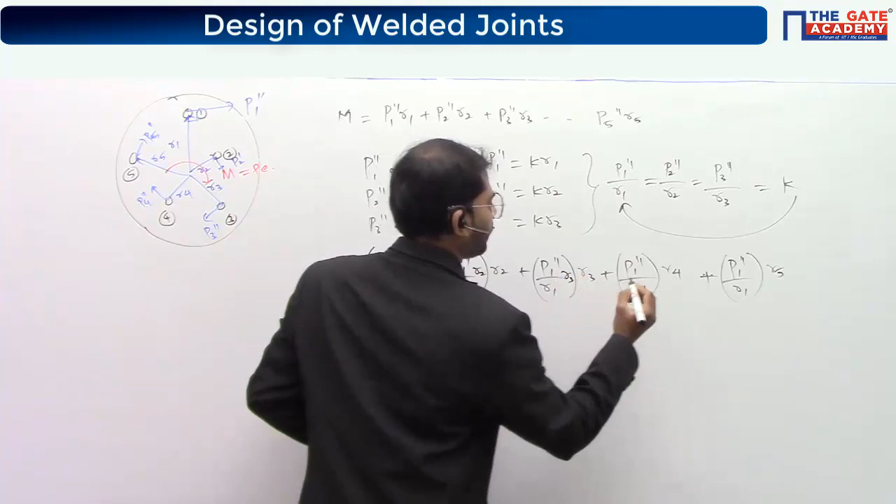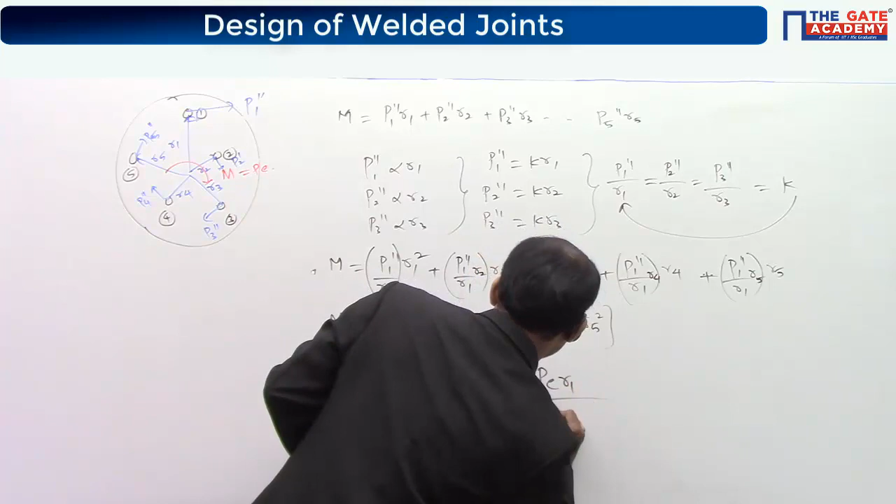Into R5. So this gives you P1 double dash by R1 whole into R1 square, R2 square, R3 square, so on up to R5 square. This is moment M here. So this gives you P1 double dash as M into R1 by R1 square, R2 square, so on up to Rn square, or this also can be written as P into E into R1 by R1 square, R2 square, so on up to Rn square.

So this is a formula I gave you for a secondary load. Clear? Understood? So this is the derivation, but if you just remember that force is proportional to R, this will help you to answer this question. This is GATE 2016 question.